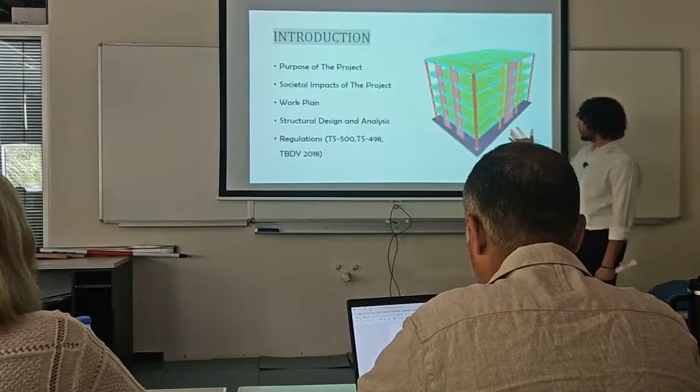So here is the introduction. The purpose of our project was to design a dormitory building in Şile for the students of Ishik University, because Ishik University is in an area away from cities, so most students live more than 20 kilometers away. There will be high demand for students who want to live in dormitories because the prices of houses are expensive. So we wanted to make a dormitory building in Şile, and it will have high demand because Ishik University is in a very isolated place, not in a big city.

Throughout this presentation, I will talk about the social impacts of the project. We will talk about the work plan, the structural design and analysis, and the regulations which we use. These are the Turkish standards that we used throughout the project.

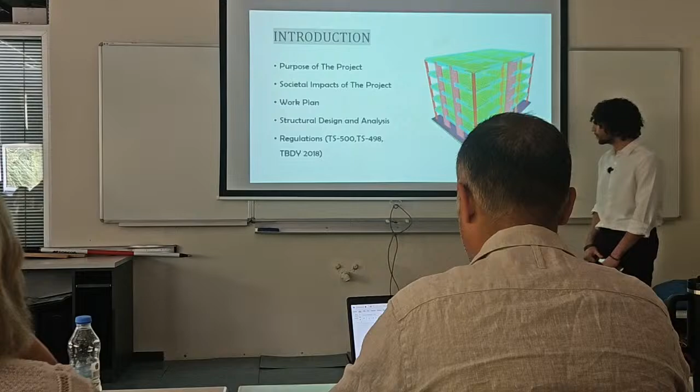Also, I want to mention that throughout this presentation, we use knowledge that we obtained from courses like computer-aided design for plan drawing on AutoCAD. We used knowledge from soil mechanics and foundation engineering to choose the type of foundation we wanted to design. We also used knowledge from Structural Analysis 1 and Structural Analysis 2 courses. For the modeling of the SAP building, we also used knowledge from the computer-aided structural analysis course taught by Dr. Onder and Dr. Bora. Please go to the next slide.

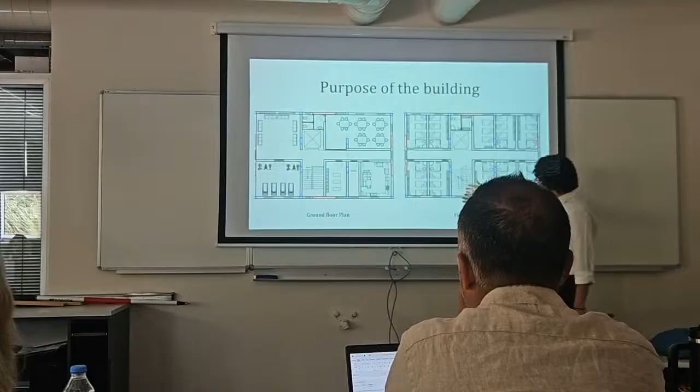From floors 2 to 5, as I said, it's a dormitory building. We will have 10 dormitory rooms, each fitting 3 students, each with its own bathroom. Again, the stairs and the elevator. Since each room fits 3 students and we have 10 rooms, that's 30 students per floor. Since we have 4 room floors, we will have a total of 120 students residing in this building. We expect the building will be full most of the time because of the high demand for accommodation in Şile.

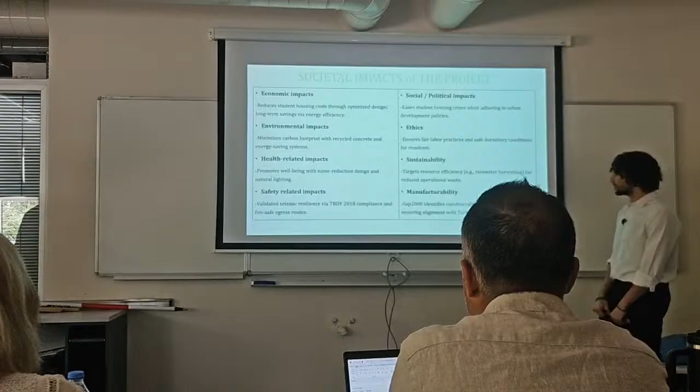Please move to the next slide. Now I will talk about the social impacts of the project. The economic impacts reduce student housing costs through optimized design and long-term savings via energy efficiency. The environmental impacts minimize carbon footprint with recycled concrete and energy-saving systems. The health-related impacts promote well-being with noise reduction design and natural lighting. For safety-related impacts, it has validated resilience via TBDY 2018 compliance and fire-safe egress routes.

This is the code that we will use for earthquake design. For the socio-political impacts, it eases the student housing crisis while adhering to urban development policies. For ethics, it ensures fair labor practices and safe dormitory conditions for residents. For sustainability, it targets resource efficiency, for example rainwater harvesting, for reduced operational waste. Finally, for manufacturability, SAP 2000 identifies constructability challenges early, ensuring alignment with Turkish material standards.

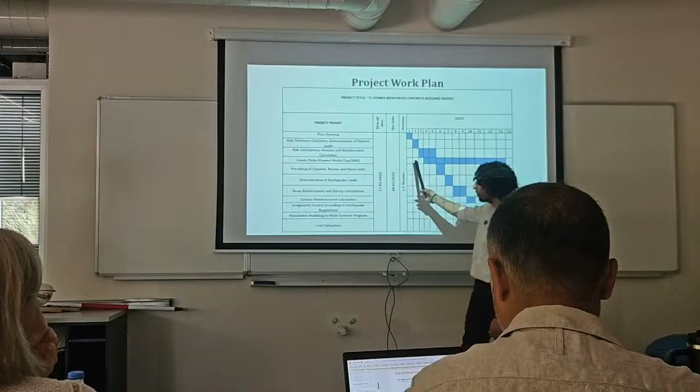Next slide, please. So this is our project work plan, covering the 14 weeks of the semester, with our starting date and finish date. It took us about 3.5 months. Our first project phase was plan drawing, which we did on AutoCAD.

After that, we did the slab thickness calculation, determination of vertical loads, i.e. dead and live loads. Then we did the reinforcement calculations for the slabs. Then we created the finite element model on SAP 2000. Then we did the pre-sizing of columns, beams, and shear walls to ensure that our original dimensions were sufficient to withstand all loads.

After that, we determined the earthquake loads. We did beam reinforcement and stirrup calculations, column reinforcement calculations, and finally we checked irregularity control and earthquake regulations, and we did the foundation modeling. Finally, we did the cost estimation.

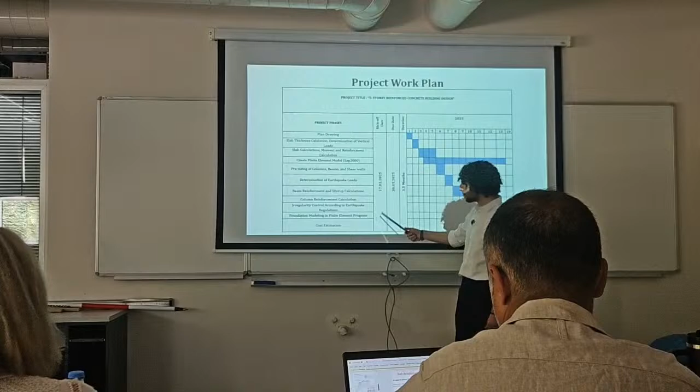It is worth mentioning, since our system is symmetrical, it is very unlikely that we will have any torsional irregularity, but we will check for torsional irregularity later in the slides.

As you can see, we were inspired by the earthquakes that are happening in Turkey. So we wanted to build an earthquake-resistant building. So we included shear walls so they can resist the shear forces of the earthquakes.

Here are our original column dimensions. All columns were 35 by 70 centimeters. The beam width was 25 centimeters, and the beam height was 50 centimeters. Our shear walls in the X direction, this one and this one, are 4 meters by 30 centimeters. And for the shear walls in the Y direction, it is 2 meters by 30 centimeters. This is the plan before the pre-sizing calculations.

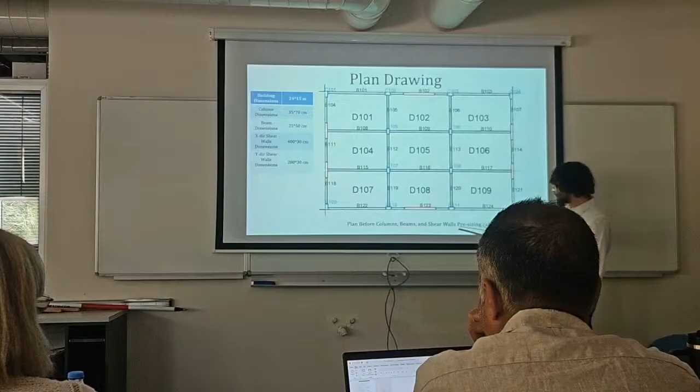Next slide, we will talk about slabs, and Ahmed will explain slabs. Thank you. As you know, every building consists of slabs, beams, columns, shear walls. So in these slides, we will show the calculations, the reinforcements, how we obtained all the parameters. At the beginning, we will talk about slabs.

We will first find the thickness of the slab. Secondly, we will determine how much vertical load is acting on the slab. After calculating vertical load, we will calculate the moment, and finally we will use the value of those moments to find how many rebars are needed for each slab.

At the beginning, we are going to calculate whether each slab from those 9 slabs is one-way or two-way slab, using this formula.

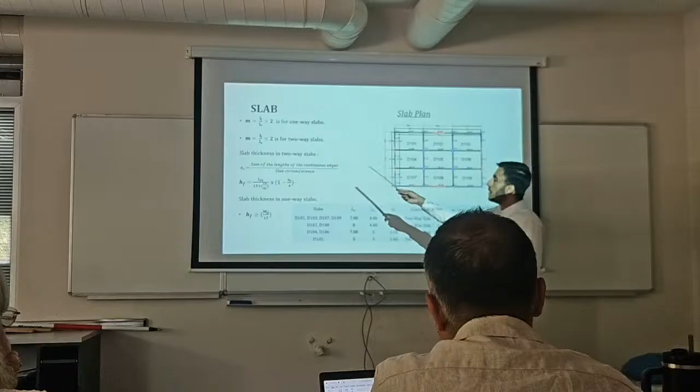For those slabs, D101, D103, D107, D109, we have this, the longest length, and here the shortest length. After dividing both of them, we will find the parameter m. If it is more than 2, that means our slab is one-way slab. If it is smaller than 2, that means our slab is two-way slab.

So after doing this for all slabs, we find that all our slabs are two-way slabs. Since all our slabs are two-way, we are going to use this formula to find the thickness for the slab. As you can see here, the m value is obtained.

This is the shortest net length, which is this length from here to here, from here to here, from here to here. And lastly, this alpha s, which means the sum of the lengths of the continuous edges over the slab circumference.

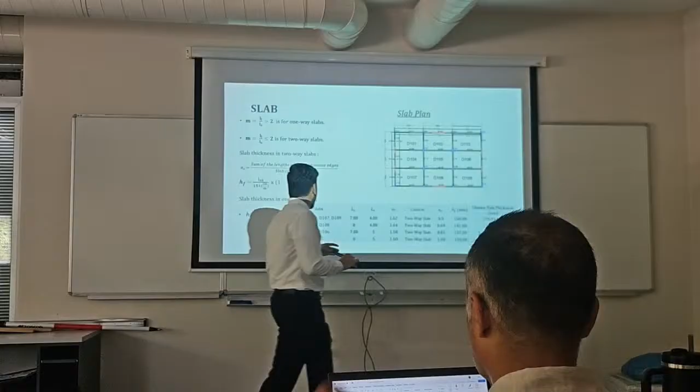We did this formula for all slabs. We obtained those values, and by putting them into this formula, we obtained those thicknesses. As you can see, the most critical thickness here is 15 centimeters. To be on the safe side, we took all the slab thicknesses as 17 centimeters.

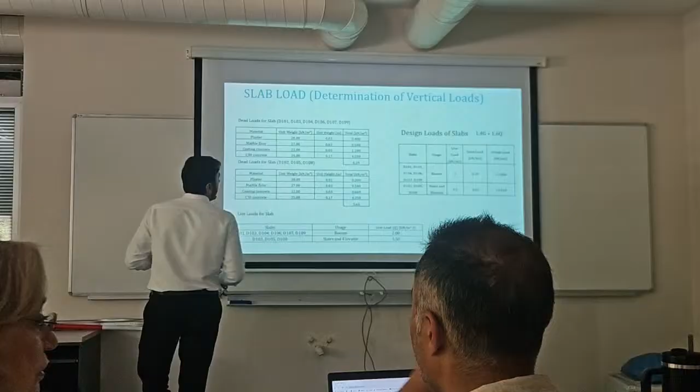After we found the thickness for each slab, now we need to find the vertical loads. The vertical load, as you know, is a combination of live load and dead load. So for dead load for each slab, I should mention that we divided our slabs into two categories.

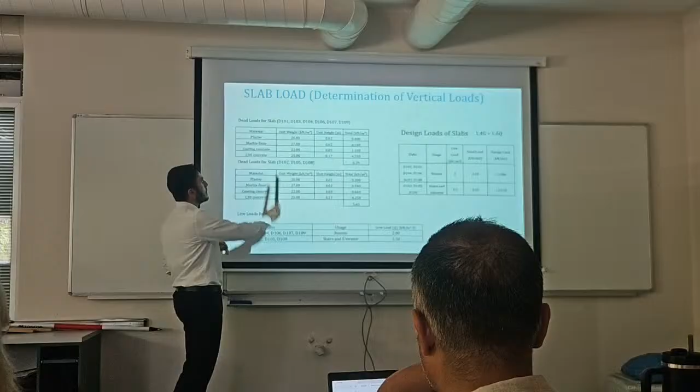First, stairs and elevators. Second, room slabs. For room slabs, we have some materials on the slab, which are plaster, marble floor coating, and C30 concrete. Here's the unit weight for each of them. For example, for plaster, we chose to put 2 centimeters on each slab for room slabs.

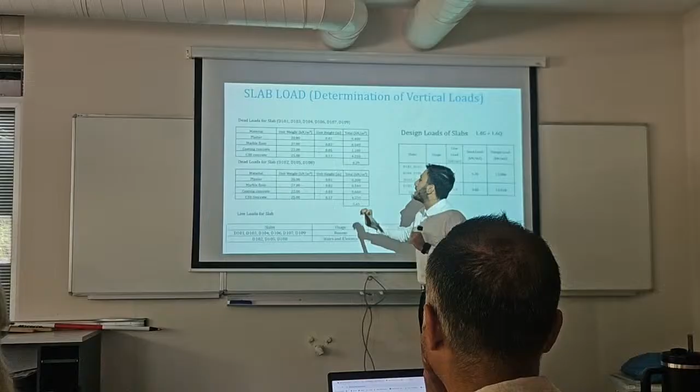We obtained those values by multiplying this times this equals this. So here for room slabs, this is the dead load, and for stairs and elevators, this is the dead load. For live load, it's from Turkish standards: for rooms, it's equal to 2 kilonewtons per meter square, and for stairs and elevators, it's 3.5.

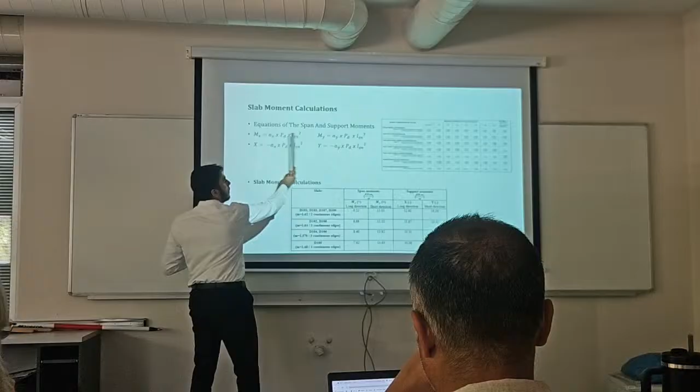Using this combination, we will find the design load for each slab. Using the value we obtained before, the vertical load, we will plug it here, and the shortest length, which is shown in the plan view.

We only have to find these coefficients using this table. We will find the moment acting on each slab, and we will find this moment in both places.

Firstly, at supports, which is the place near the beam, and secondly at the opening span, which is almost in the middle of the slab. Using those equations, we obtained those values. So this is the moment values at span and at supports.

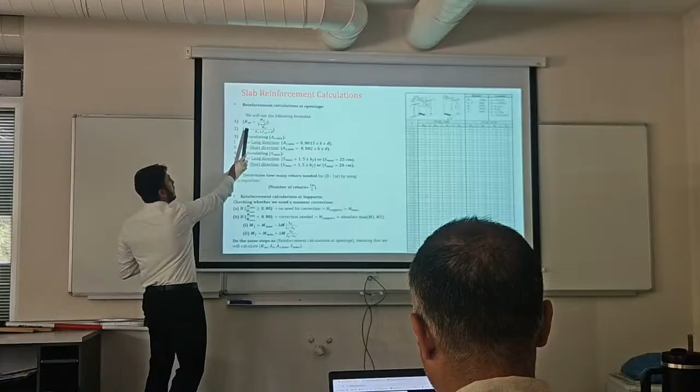After we found the moment, now with the last part, we need to find how much rebars we need for each slab. In order to find this, these are the formulas that we used. Briefly, from the first formula we will obtain the Km value. From the Km value, plus knowing that we are using concrete class C30, we will obtain the Kz value. From the Kz value, using this formula, we will obtain As.

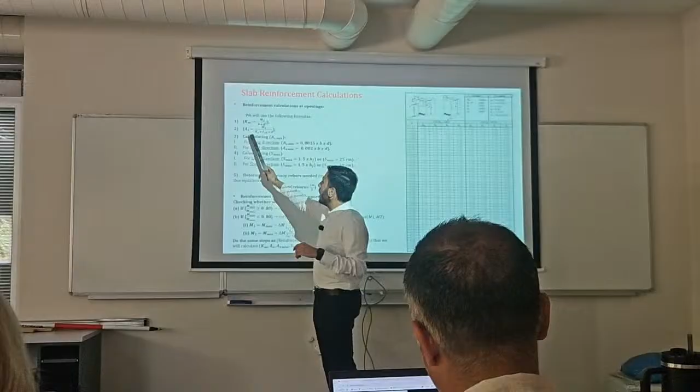As means cross-sectional rebar area. From this cross-sectional rebar area, we will determine how many rebars we need to use. But there's a control we should do first. After finding this area, we will find the minimum area according to the regulations. We will compare between them and take the greatest value. After this, we will calculate the S maximum spacing between rebars. And from those, we will find the rebars.

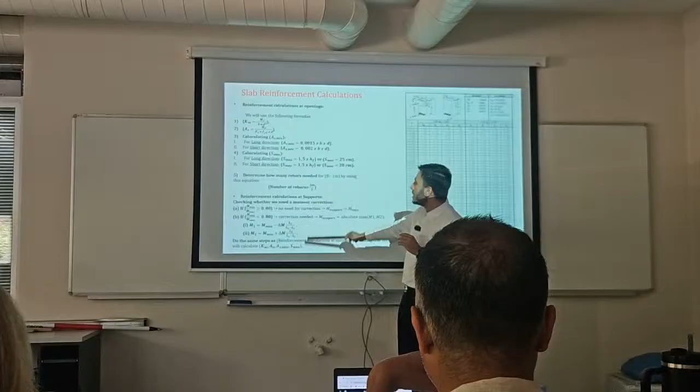But we are going to find the rebars both at openings and at supports. This is the procedure that we follow to find the rebars at the openings, and this is the procedure when we find it at supports. It's almost the same procedure, only there is one step before. Let me show you in plan view. At supports, as I said before, here there's slab D101 and here there's slab 102. Both of them exert moment to this beam. So here's the support, here moment 1, moment 2.

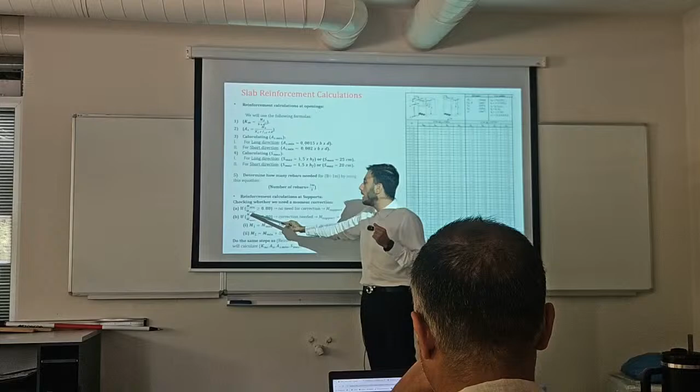So we are going to divide the minimum moment over the maximum moment. If this value is greater than 0.80, that means no need for correction. If it is lower than 0.80, that means correction is needed. And this is the formula used. After finding the moment, we will follow again the same procedure. Let me show you. This is just an example; all the details are shown in the report.

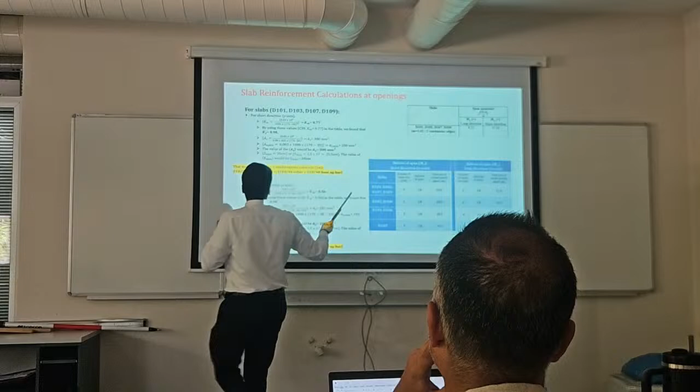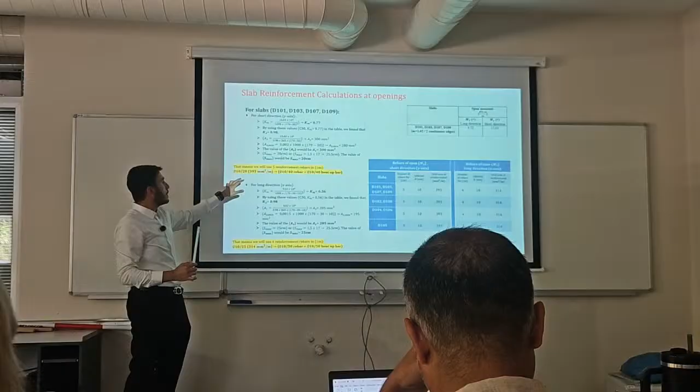Here it's shown. The same, we are going to do the rebars for the Y direction and X direction for each slab. After we did it for the Y direction, we find this. After we did it for the X direction, we find this. And here's the conclusion. For those slabs, this is the number of rebars needed, this is the selected diameter, and this is the total rebar area. This is at openings, at span. After these slides, we are going to do it for supports. Go to the next slide.

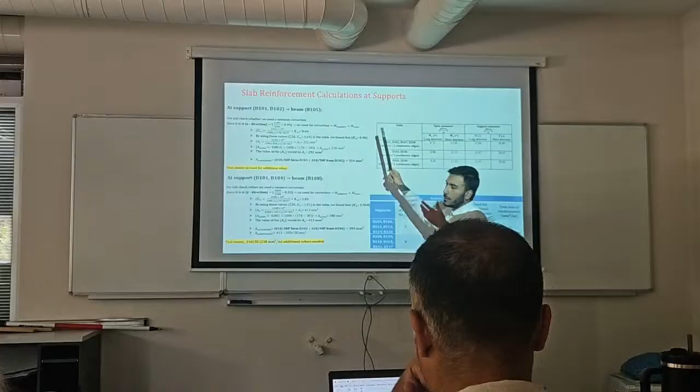Here, as I said, we did it for openings. Now we will do it for supports. Again, same procedure. We follow it, and we find here we don't need rebars because it's already sufficient. Here we need this much rebar, and this is the conclusion. For these slabs, we need this much rebar.

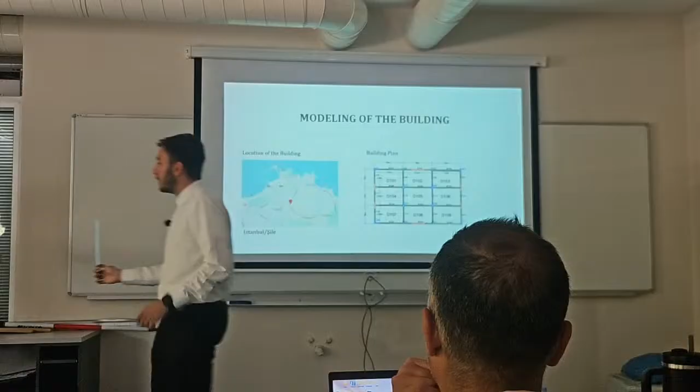Now we continue. As I said before, we decided that our building will be in Şile. This is Şile, and this is where our building will be. This is the plan that we modeled. Again, I emphasize that the shear walls are very important for resisting earthquake loads. Next slide.

And this is the modeling of the building in the SAP 2000 program. We used C30 class concrete. 30 here refers to the characteristic compressive strength of concrete, which is measured 28 days after mixing, in megapascals. We also used class S420 steel. The story height is 3.2 meters.

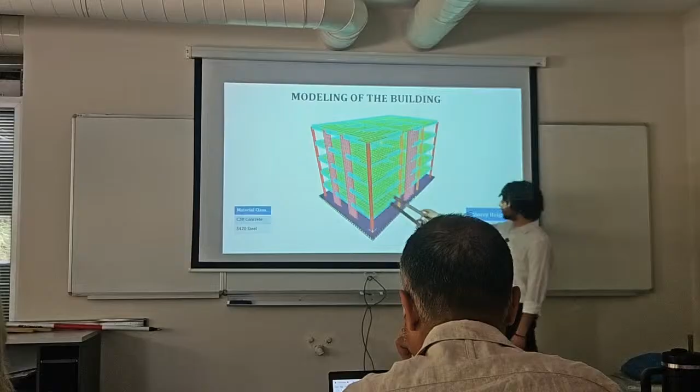During the modeling of the building, we would first start by assigning frame sections like the columns and the beams, and we also assign area sections like the shear walls and the slabs. Next slide.

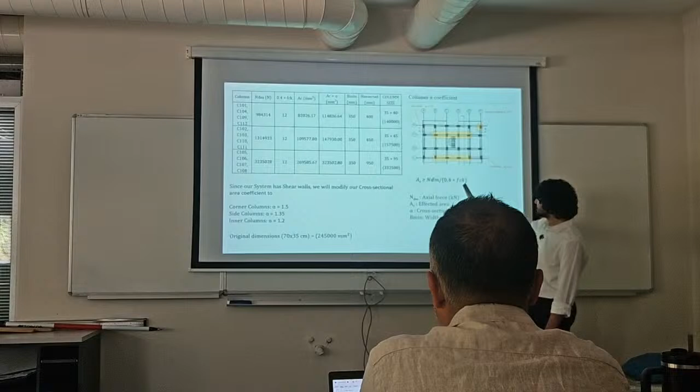Next slide, please. So here, to do column pre-dimensioning, we have to use this formula. This is the critical cross-sectional area. This is the normal force values that are acting on the columns. We obtained these values from the SAP 2000 model. And this is the characteristic compressive strength of our concrete. It will be equal to 30.

So here we start: 0.4 times 30 is 12. And this is the value that we got by plugging in the normal force and 30. This is the critical cross-sectional area that we need for the column. And then we will have correction factors. So normally, in a normal system with no shear walls, the correction factors will be 1.5 for side columns, 1.7 for corner columns, and 1.3 for inner columns.

But since we have shear walls in our system that will help carry some of the normal forces, some of the loads on the columns, we are using these correction factors. They're a bit less, but we have shear walls in our system, so we will use these correction factors. After multiplying this cross-sectional area by 1.5 for corner columns, we will obtain this minimum cross-sectional area. For side columns, we multiply by 1.35. For inner columns, we multiply by 1.2.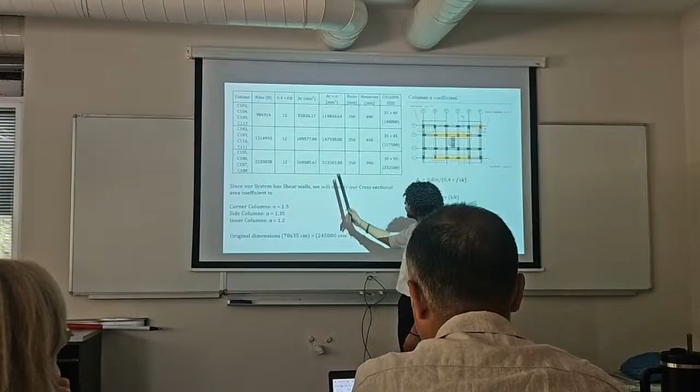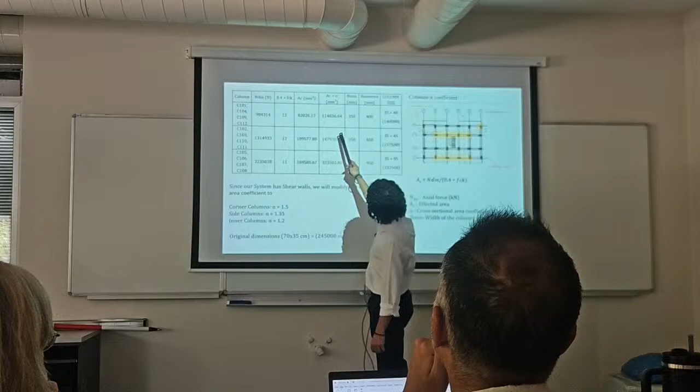So our original dimensions for all columns were 245,000. And here the critical area was, I believe, 114,836. Okay, it was 114,000 millimeters square, which was not sufficient. So we had to change the...

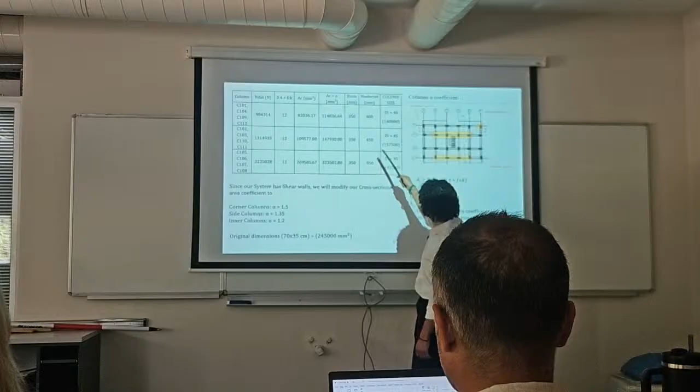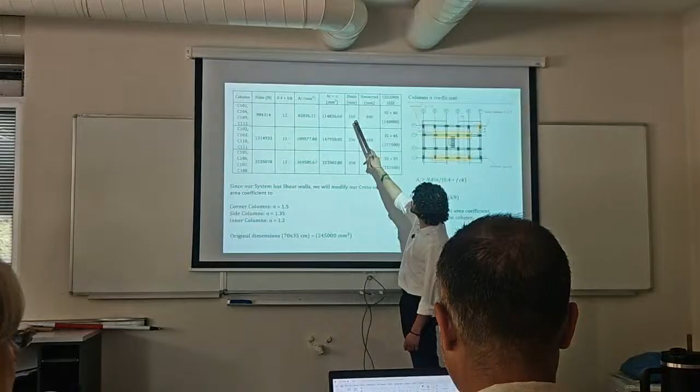Sorry, I think there's a mistake here. I think here was sufficient. The third one only wasn't sufficient. So because of this third one, we changed all of them to be sufficient. So our new dimensions are 350 by 400. This is 140,000, which is greater than 114,000, so this is okay.

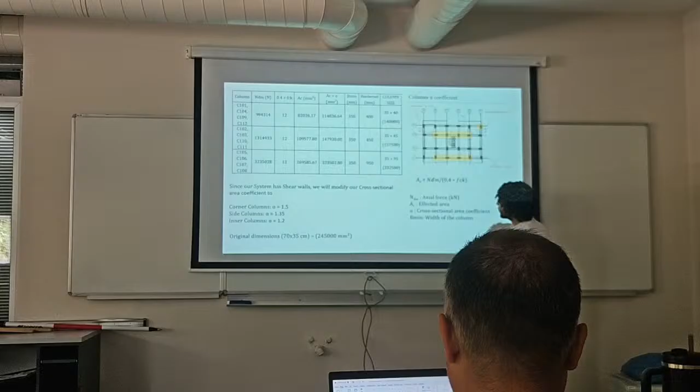We selected these new cross sections, so 350 by 450, it is 157,500, which is greater than 147,000, so this is okay. And 350 by 950 is the new dimension of the inner columns, and it is equal to 332,500 millimeters square, which is greater than the critical cross-sectional area. So this is satisfied. So we'll have these new column dimensions.

Okay, next slide, please. Now we will talk about the beam pre-sizing calculation. So for all beams, we have this condition that must be met. The beam width should be equal to or greater than 250. Our original beam dimensions are 250 for the width, so we don't have to change the width. Now for the outer beam size calculations, these are the span lengths, and this HK value represents the height of the beam, and we will calculate this HK value. So for outer beams, we will divide the span length by 15.

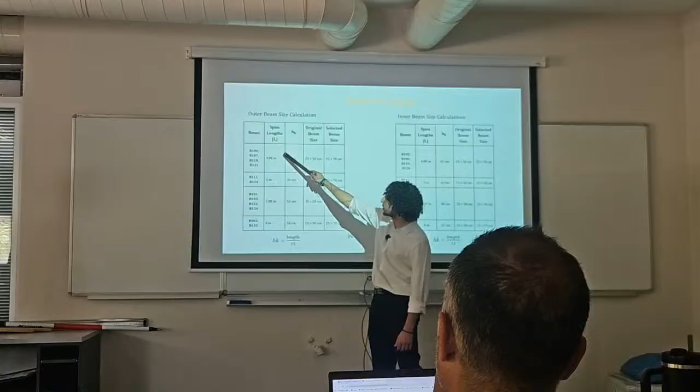So by dividing 4.88 by 15, we get 33 centimeters. 5 by 15, we get 34, and so on. For the inner beams, it's the same thing, but we divide by 12. So the beam height for this beam should be at least 67. For this beam, at least 66. For this beam, at least 42.

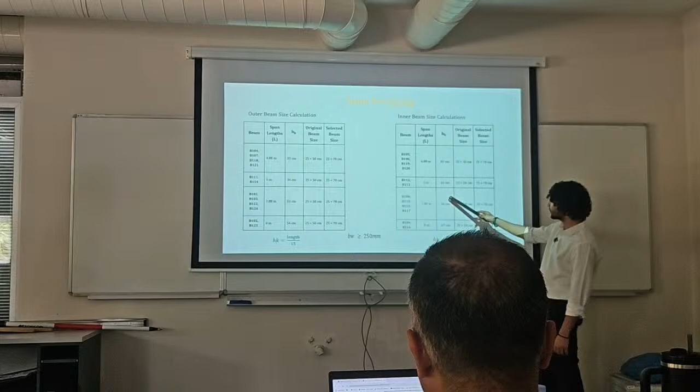But since we want to make the later calculations easier for beam rebar and beam stirrup calculations, we decided to give all beams the same height. So we gave them all 70 centimeters, which is enough. Our original beam dimensions were 25 by 50 centimeters, so the height was 50. Now it will be 70 centimeters, and it satisfies. Next slide, please.

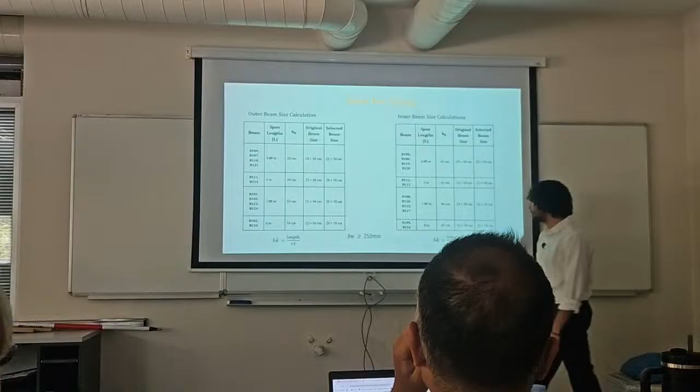Finally, for pre-sizing calculations, we will talk about the shear wall pre-sizing. First of all, we have these conditions that also must be met. The H value, which is the thickness of the shear wall, should be greater than 25. For all shear walls in our system, the thickness was 30 centimeters, so it satisfies this first condition. Also, the H value should be greater than the story height, which is 3.2 meters, divided by 16.

So here when we take 320 centimeters, or 3.2 meters, divided by 16, it is equal to 20. And since our h is 30, 30 is greater than 20, so it's okay. And this is for both shear walls, the ones in the x direction and the ones in the y direction. And finally, this condition is what differentiates shear walls from columns. If b over h, the length of the shear wall divided by its thickness, is greater than 6, then it will be considered a shear wall.

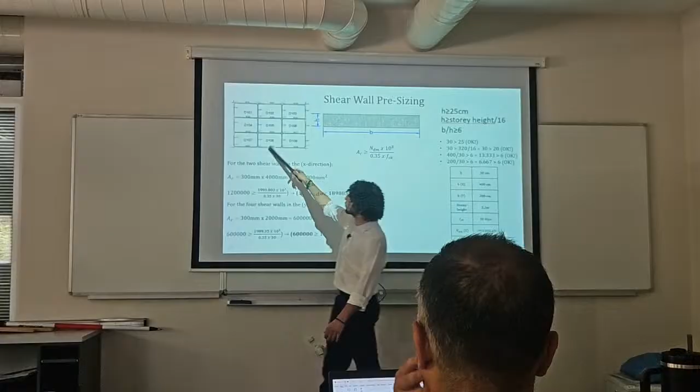If it was less than 6, it would be considered a column. So the length of, let's say, the shear walls in the x direction, this one and this one, is 4 meters. So we divide 4 meters by the thickness of the shear wall. So 400 divided by 30, it is equal to 13.33, which is greater than 6. It's definitely a shear wall.

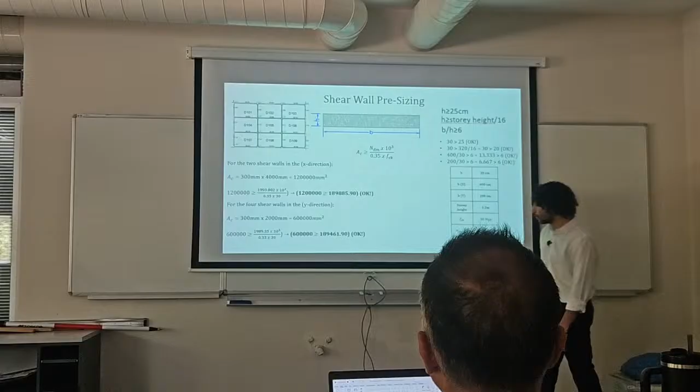And for the shear walls in the y directions, the length is 200 centimeters. So we divide 200 by 30. It's 6.67, which is greater than 6. So it is a shear wall. Also, we have to use this formula to find the critical cross-sectional area.

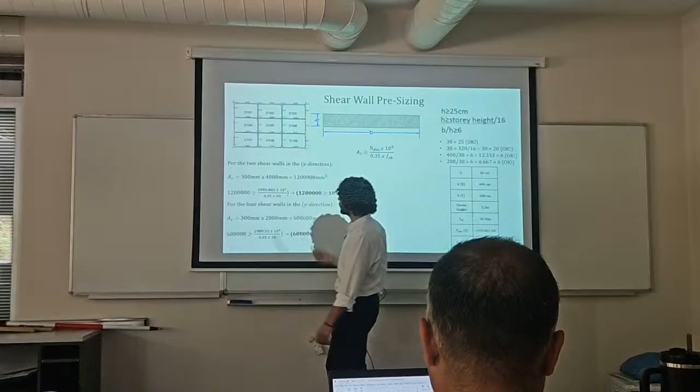The normal force values acting on the shear walls that we obtained from the SAP 2000 program are here. FCK is equal to 30. So this is for the x direction shear walls. This one and this one, they're symmetrical, so they will have the same value. Again, for the y direction shear walls, they're symmetrical. All of them will have the same value.

So at the start, let's calculate our original dimensions cross-sectional area. For the x direction shear walls, it is 30 by 400, or 300 millimeter by 4,000 millimeter, which is equal to 1,200,000 millimeter square. Then after we plug in this formula the normal force that we got from the SAP model, and FCK is equal to 30, we will find that the critical cross-sectional area is 189,000. It's enough, so we don't have to change it.

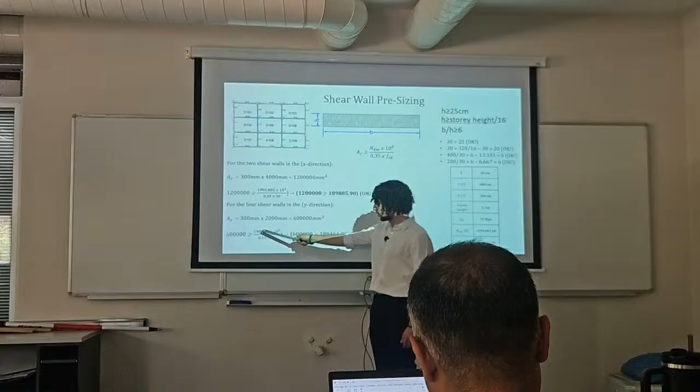For the y direction, we just plug in this y value for the N. And again, our original dimensions were 30 centimeters by 200 centimeters. When we multiply to find our cross-sectional area, it's 600,000 millimeters square. The critical is 189,000, and since our original dimensions are greater, that means they are sufficient.

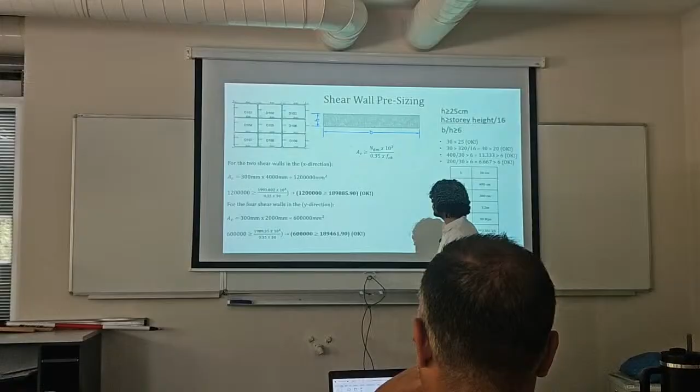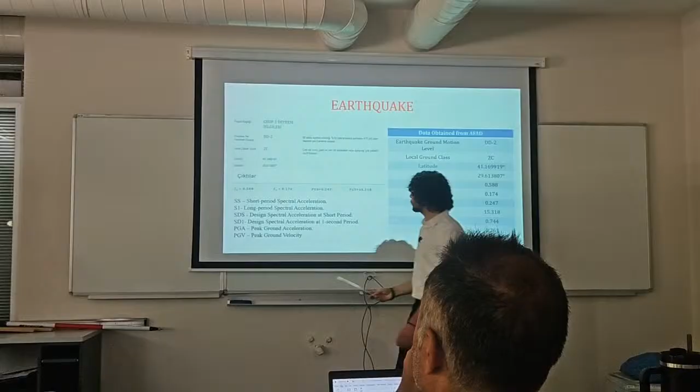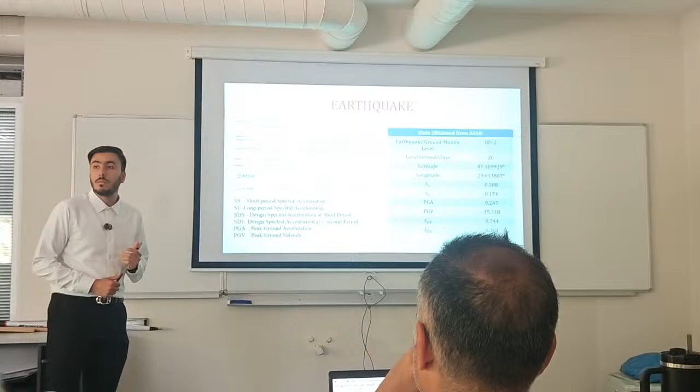Ahmed, how many slides remain? It's 49 slides in total. I think we're halfway through. Half? Yes, I think. We have a big lack of time. I mean, it's approximately 1 hour. Can we skip to the important parts? Of course, we will skip to the important parts. We will do it faster. Is it okay? Okay. Within maximum 10 or 15 minutes, finish it. Within 15 minutes. Okay, we're gonna try.

For earthquake, as you know, we are planning to construct our building in Şile, which is in Istanbul, in Turkey. As you know, Turkey is located in an earthquake zone. This is why we should construct our building accordingly, which means we should make sure our building is constructed satisfying the regulations. Since we are using a coupled shear wall building, we will have this R value and D value. From those values, we are going to find RA. Those values that we obtained from those tables, we are going to show how they're used.

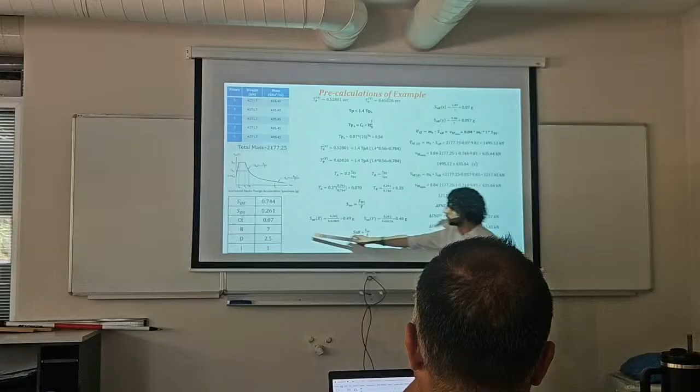5 and less than 1, we will use this formula for SAE, which we will use in SAR, which in turn we will use later on. For SAE, it's SD1 over the period, so it equals this. SAE in the y direction is equal to this. Then SAR is equal to SAE over R. R, we got it from the table before as 7. G here is the gravitational constant, 9.81.

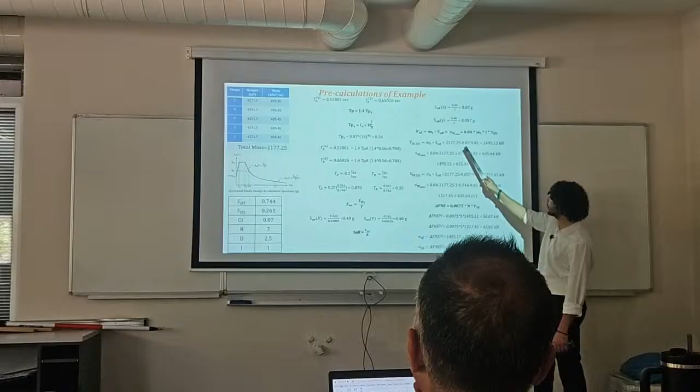We will find VTE and VTE minimum. VTE depends on the mass of the building. We obtained the values of the weight of the building from SAP 2000, and then we divide them by the gravitational constant to get the mass. The total mass of the building is 2,177. So this is M. SAR, we'll do it once for X, once for Y, and substitute in. For VT minimum, again the mass of the building, I is the importance factor, we got it from the table before as 1, and SDS also from here.

We calculated VTE and VTE minimum, and we should have VTE greater than VTE minimum, so it is okay. Again, for the Y direction, we do the same thing. And then, using the VTE value, we will calculate delta FN. N here is the number of stories that we have. Since we have 5 stories, we use it as 5.

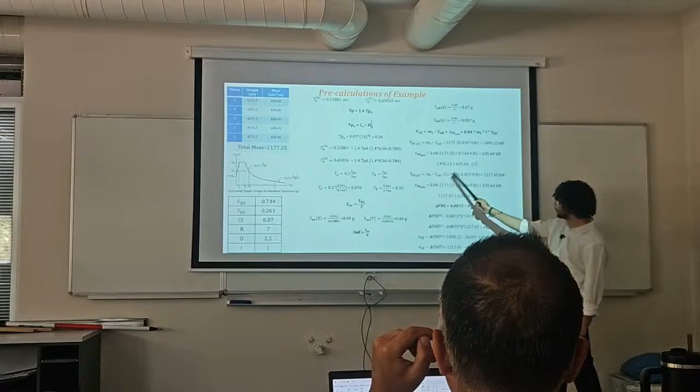This is the VTE value we found for the X direction, and for the Y direction, it's this one. We substitute to find delta FNE. Then we calculate VTE minus delta FNE to get these values, which we will use in the table in the next slide.

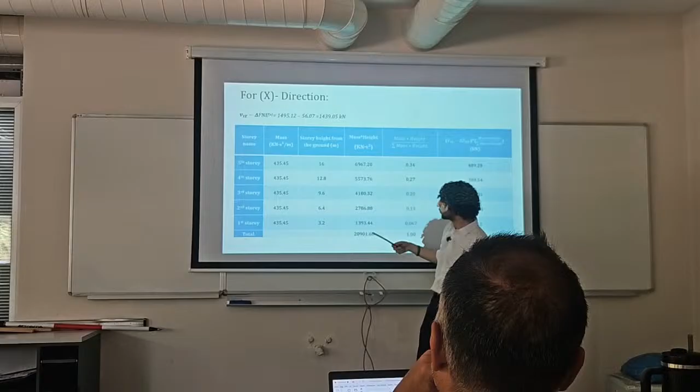This is the last value we found, for the X direction. These are the masses of the building, and this is the story height from the ground, 3.2, increasing by 3.2 for every story. We multiply this by this to get this column, then divide this value by the summation of this column to get the next column. Finally, this column is the part we found in the previous slide. By multiplying these two, we find the earthquake forces acting in the X direction.

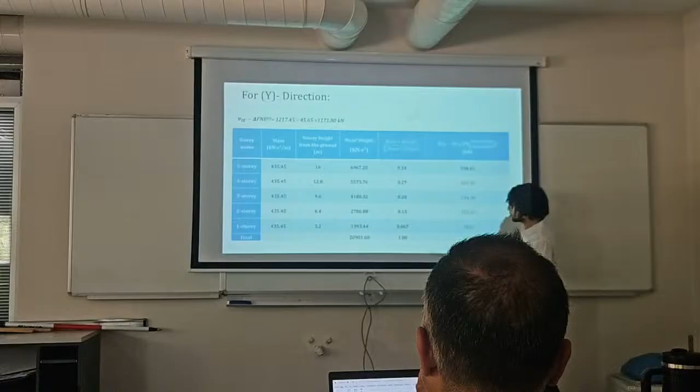In the Y direction, everything is the same. The only thing different is this value, which we substitute here to get these forces. Again, these are the forces in the Y direction, and these are the shear forces obtained in the same manner.

Now Ahmed will explain the beams. Can you explain in general? Yes, in general, all the values, okay? Oh okay, in general, explain it in general, okay.

After finding the earthquake forces, now we are curious about beam rebar calculations. We need to find how much rebar each beam contains. So here's the procedure we are going to use.

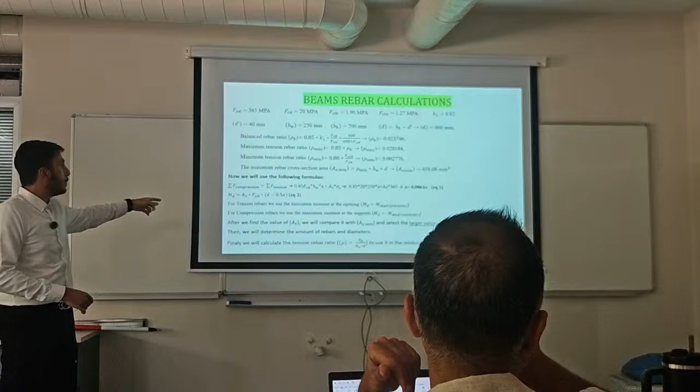As you can see here, we have equation 1 and equation 2, and this moment we obtained from SAP 2000. Using equation 1 and equation 2, we will find the area of tension rebars.

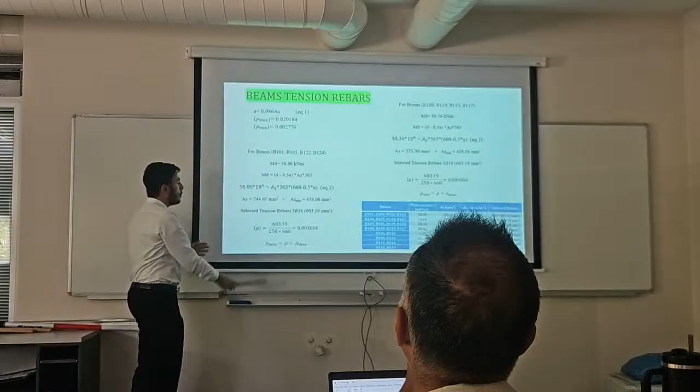It's unitless, is it a coefficient? Yes, it's a coefficient. Rho means the ratio of tension rebar area within the beam. It's just a ratio, so we use this and this to check whether our rebar ratio is sufficient or not. Both of these are constants.

We will find tension rebars and compression rebars. This is tension rebars. After applying these formulas and this procedure, we should select 3 rebars for each beam, with a diameter of 16 millimeters.

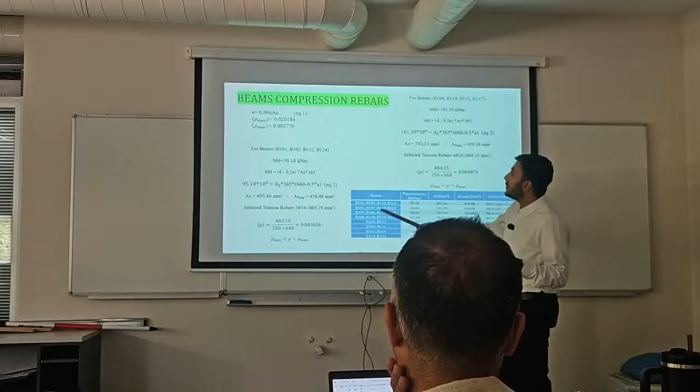After this, we go to compression rebars. From the same procedure, we find that for most beams we will use 3 rebars with the same 16 millimeter diameter, except for those specific beams, where we will use 4 rebars.

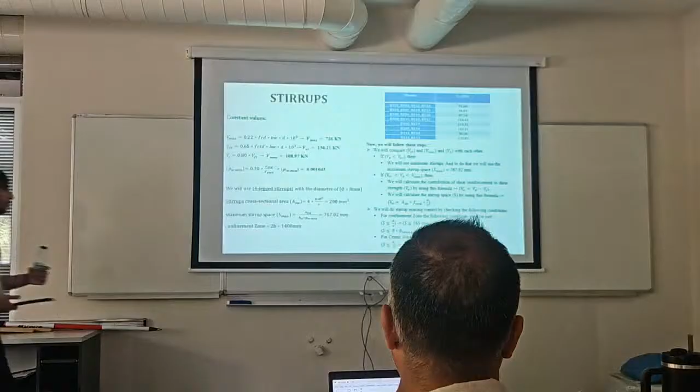After this, we move to stirrups. We follow this procedure for calculating the stirrups of the beams. If VD is smaller than VCR, we use Smax, which we calculated here. If VD is greater than VCR but less than Vmax, we find VW, and from VW we find the spacing, then apply these conditions.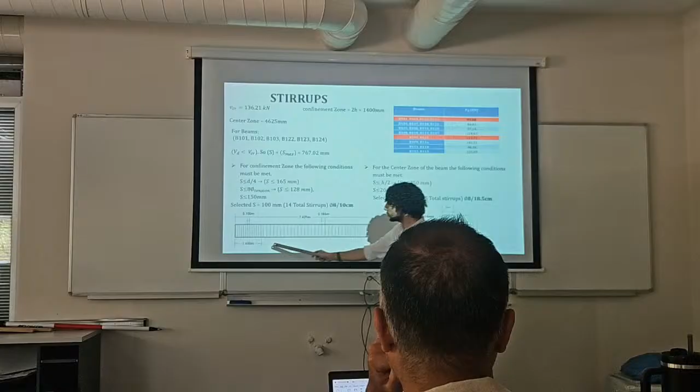We use these values: the maximum spacing should be 767, but also less than 165, less than 128, and less than 150. This is the diameter of the tension rebars calculated previously. Since it should be less than 128, we chose the spacing as 100 millimeters.

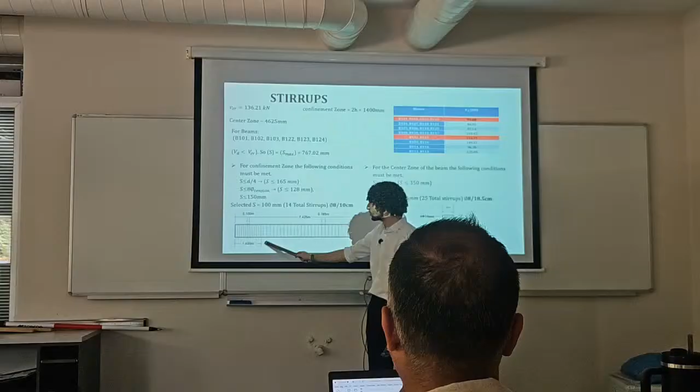As you can see here, this is for the confinement zone, so this is here and here. For the center zone of the beam...

These conditions must be met. Again, our Smax is this, it should be less than 350, and less than 200. So we chose 185, which gives 25 total stirrups. This is the center zone.

Next. These are the same, I think. Yes, yes, they are the same.

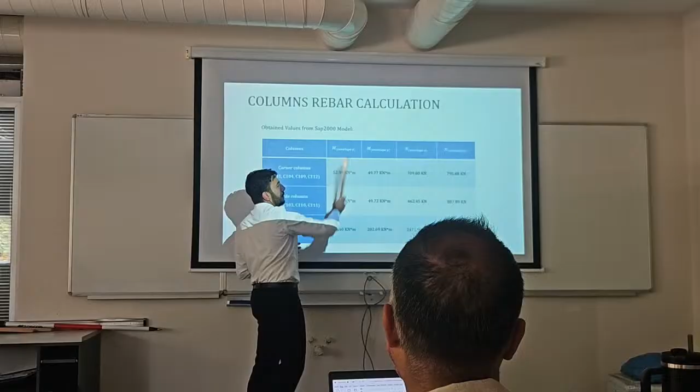For columns, from SAP 2000, we found moment under envelope X, under envelope Y, and normal force under envelope X and envelope Y. These are the values. We are going to choose the greatest value acting on each column, as you can see for corner columns, side columns, and inner columns. Since the greatest value is in the X direction, we are going to use this H and this lambda.

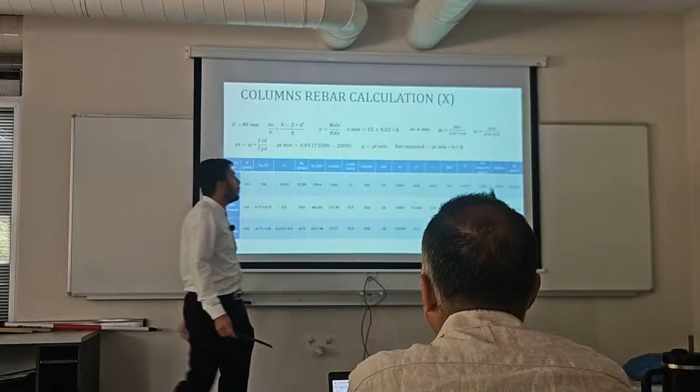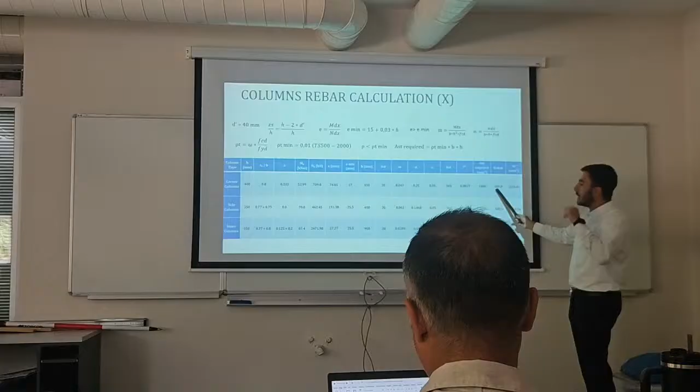By using those formulas, we obtained the following. I would like to mention that there are parameters that we should calculate, and this parameter and this parameter. From those parameters, we choose which diagram we should follow to find these parameters. At the end of these calculations and formulas, we found that for corner columns we need 6 rebars with diameter 18 millimeters, here 6 rebars 20 millimeters, and 16 rebars with 18 millimeter. This is under X, and here in Y direction. We found the same values.

This is the diagram that we used for corner columns. This is for side columns. This is for inner columns.

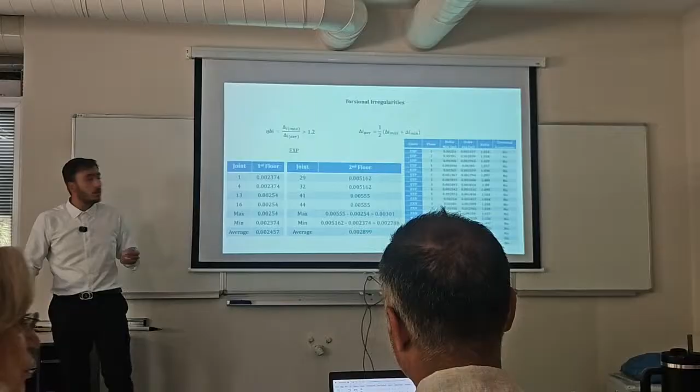And now we will discuss torsional irregularity. For torsional irregularity, we will use this formula, and if this value is greater than 1.2, then we will have torsional irregularity. But of course, we don't expect to have torsional irregularity because our system is symmetrical.

This is the maximum relative displacement, which we find from the SAP 2000 program. For example, this is the first floor under EXP loading. We take the maximum out of them. This is the maximum relative displacement, the maximum is this, the minimum is this. To find the average, we use this formula and apply it here.

We do the same for all of them. If it is greater than 1.2, then we do have torsional irregularity, but as you can see, they're all less than 1.2, so there is no torsional irregularity.

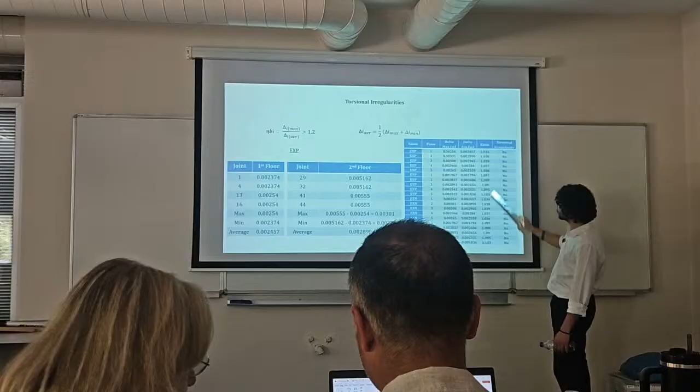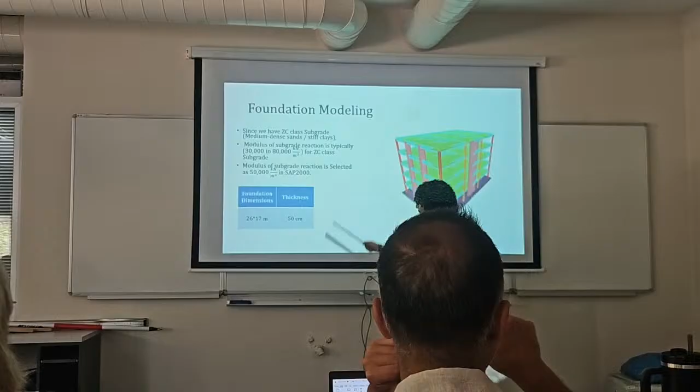For the foundation modeling, we chose a mat foundation, also known as raft foundation. Because we have ZC class soil, the modulus of subgrade reaction is typically from 30,000 to 80,000 kilonewtons per meter cubed. I chose the middle value in SAP 2000 program as 50,000 kilonewton per meter cubed. The thickness of the slab is 50 centimeters, and it extends 1 meter in all directions, so this will be the foundation dimensions.

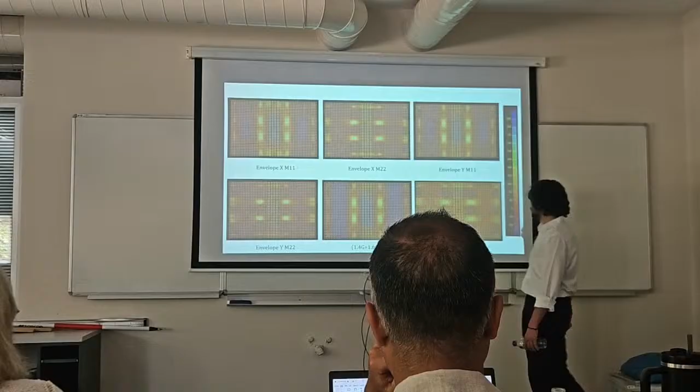Here we have the moments acting on the slabs, and what we can tell from these moment diagrams that we obtained from SAP 2000 program is that the highest moment is usually at the inner columns, less at the side columns, and even less at the corner columns. These are under different types of loadings for X and Y direction.

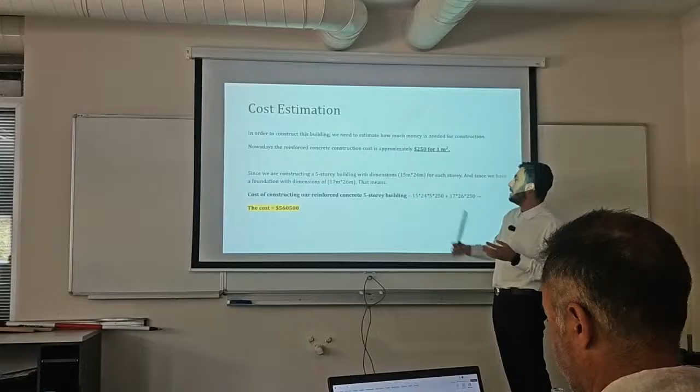And finally, cost estimation. This is the last step. In order to construct any building, you should know how much it costs. Nowadays, the reinforced concrete construction cost is approximately $250 for 1 meter square. Since we are constructing a 5-story building with dimensions 15 meters times 24 meters for each story, and since we have a foundation with these dimensions, that means our total cost would be $560,500.

And as you can see, this is a really expensive building. Go to the next slide. Honestly, our project finished in the previous slide, but this is extra work that we did to show you a revenue estimation.

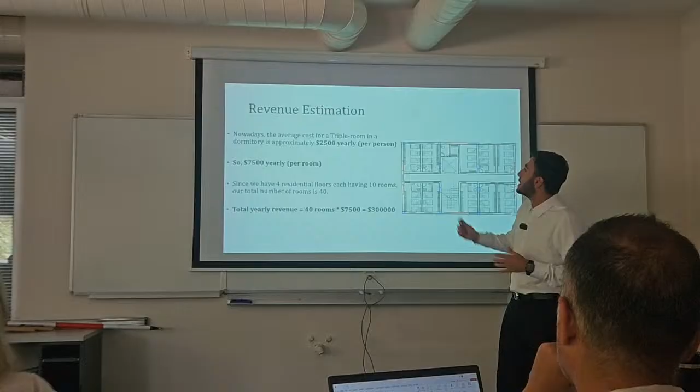As we said before, we are planning to construct a dormitory. Nowadays, the average cost for a room in a dormitory is approximately $2,500 yearly per person, and in each room we have 3 people. That means per room we will have $7,500 yearly. Since we have 4 residential floors, each having 10 rooms, that means in total we have 40 rooms.

Total yearly revenue is 40 rooms times $7,500 per room. That means in 1 year we will have a revenue of $300,000. You might think that because we take this revenue every year, within 2 years we are going to cover the high cost.

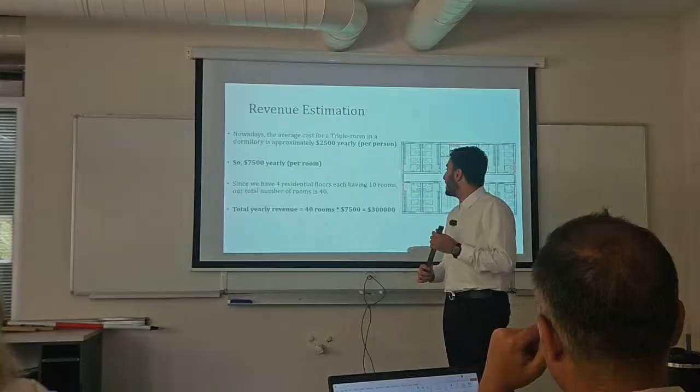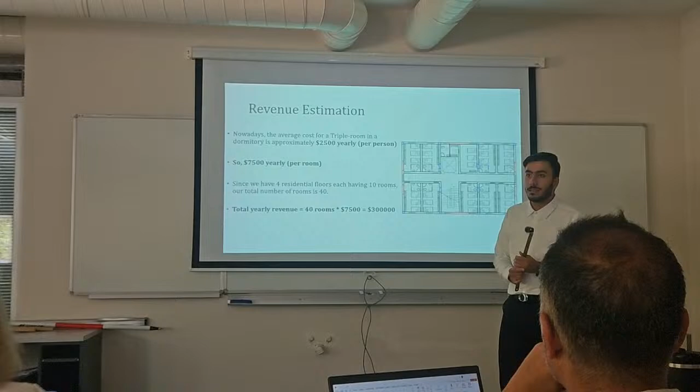Also, you can say that the cost doesn't include the land price and architectural price. Only the construction cost. So as I said, it will not cover the cost within 2 years. It's gonna take more time, but at the end, this project is profitable.

If you think after 10 years, it will give you money. It will be profitable for you.